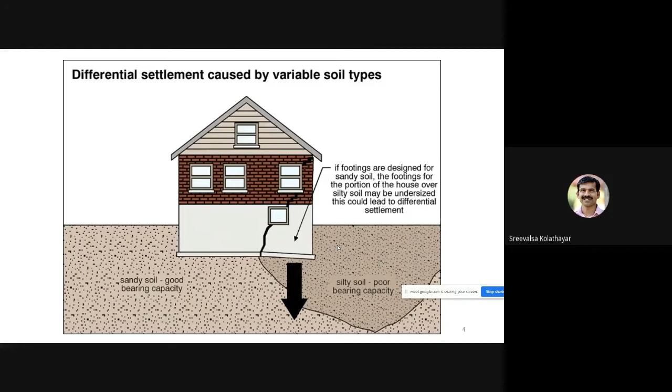If the same phenomenon of differential settlement happens to our house, it does not become a tourist spot, but it becomes a disaster because its utility value is lost. The structure will develop cracks.

So when infrastructure development takes place in a city or any region, slowly buildings come up - multi-story buildings, towers, bridges, water tanks. You see so many structures coming up, and there are so many things happening below your feet - the soil profile. The unsung heroes of civil engineering are buried right under your feet in terms of soil exploration, investigations, foundations, tunneling, and whatnot.

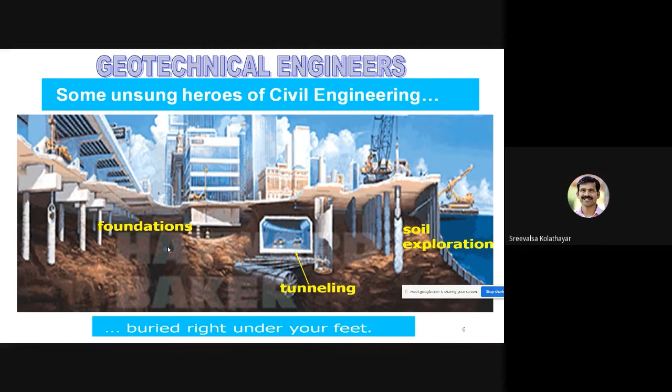If there is a very good, beautiful structure, everybody will ask who designed the building, who is the structural designer, and everybody will appreciate it. But nobody will ask who designed the foundation, who is the geotechnical engineer, who was the geotechnical investigator. Nobody will ask - only when the structure fails will people ask. When there is a failure, people will remember geotechnical engineers.

Anyway, that is a beauty and we love that.

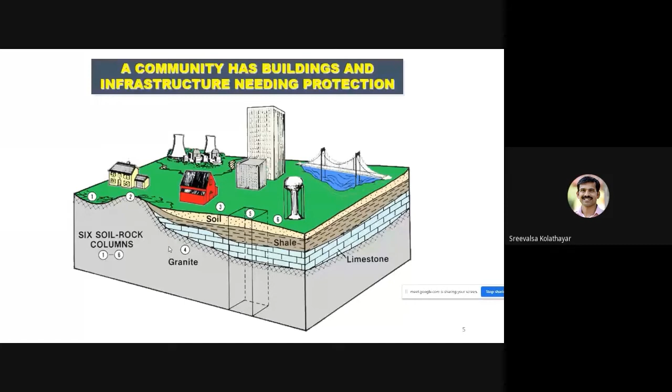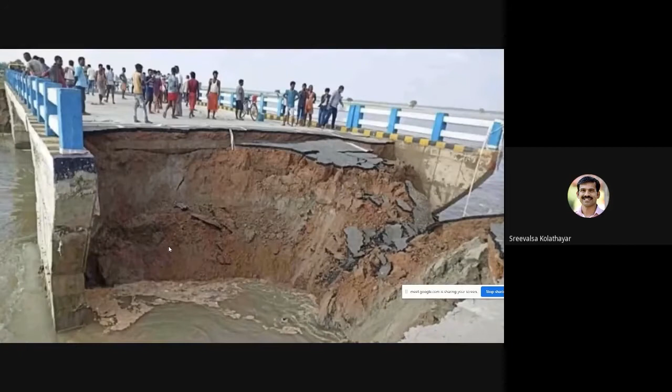This is a scene from Bihar last year during rainy season. One approach road towards a newly built bridge collapsed. So this is a kind of disaster - a land soil collapse that happened due to floods. It could have been prevented if the soil was reinforced properly or retained properly.

This is another structural collapse, another disaster - during an earthquake, a structure collapsed.

We say there is a disaster or a risk when 4 elements come together: hazard, exposure, vulnerability, and location. You can see this even when you talk about COVID risk - if you open your Aarogya Setu app, it will predict whether you are under risk or not based on these 4 factors.

Hazard - is there a COVID patient nearby? That is the hazard in this case, whether there are infected cases around you. Location - it will tell you within 500 meters there are 2 COVID patients, within 1 kilometer there are 8, within 2 kilometers there are this many. So that is why if you are now in Kerala or Maharashtra, you are under more risk.

Location, hazard, and then comes exposure. If you are wearing a PPE kit, you are not exposed. If you are wearing a mask, you are less exposed. If you are not wearing a mask, you are completely exposed. So exposure is also a main reason.

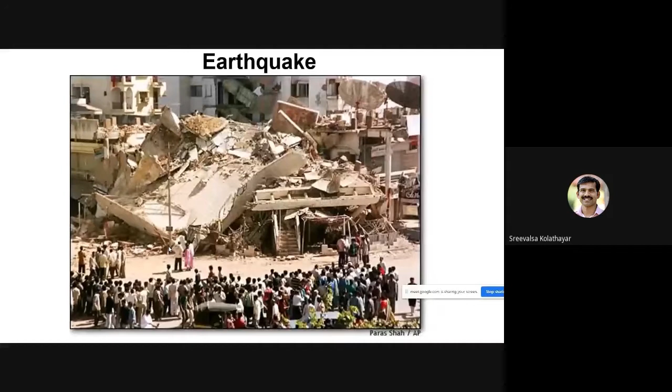Now I am showing you another picture from JR Kobe Line in Japan. This is the picture in 1992. You can see a retaining wall on the left and houses on the right.

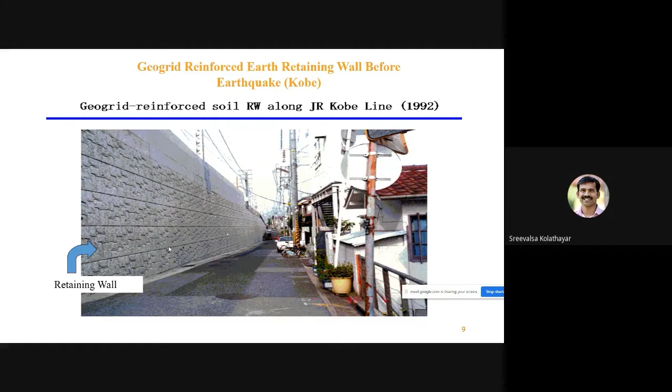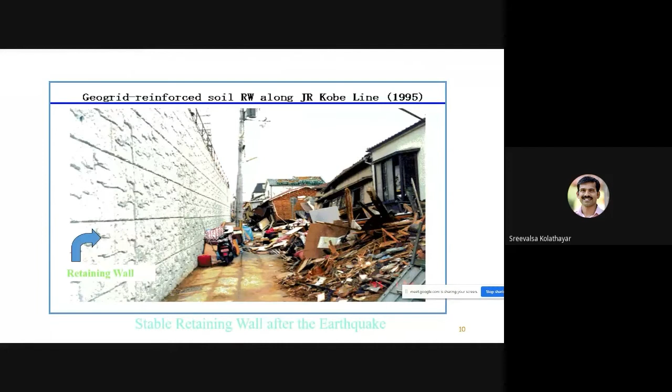In 1995, there was a major earthquake. After the earthquake, you can see all the fragile houses and buildings collapsed, but the retaining wall is very stable and intact. It is not even a concrete retaining wall, just made of soil, reinforced with geogrid. What you see covering is just fascia panels. Its vulnerability is reduced by soil reinforcement. This itself shows you the power of soil reinforcement in reducing disaster risk.

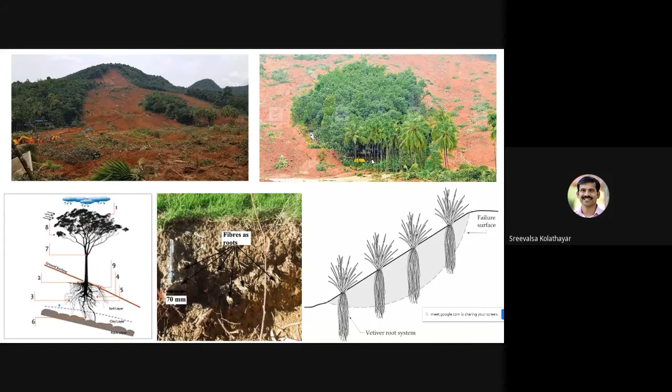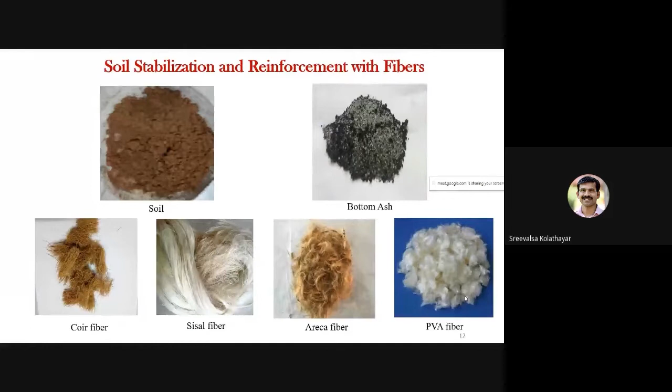This is a small study my students have done, which myself and Dr. Anil Kumar Sharma from NIT Patna jointly performed — reinforcement of soil with different types of fibers: Coir fiber, sisal fiber, Areca fiber, and also a synthetic fiber. I am showing only the final result.

We have done a couple of UCS tests and also a couple of model studies, and found that when reinforced with fibers, the unconfined compressive strength of the soil increases around 4 to 5 times with Coir fiber. Similarly with other fibers, the strength enhances. This was published in the Journal of Materials in Civil Engineering, and the model test was published in an ASTM journal.

You can see the soil fiber interface. Due to the interface friction, the strength property of the soil enhances. These are the SEM images.

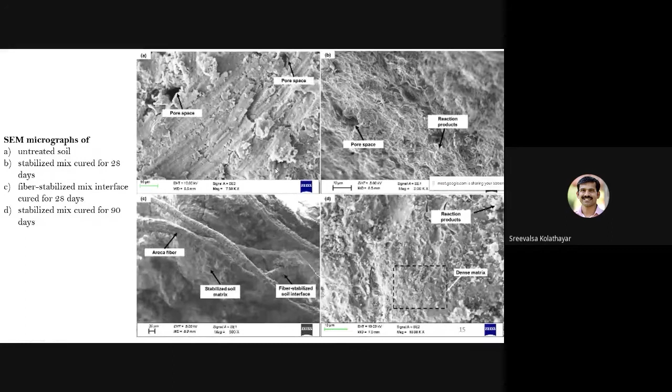That is about adding fibers to the soil and reinforcing it. Now coming to geosynthetics, a very popular method of reinforcing soil. You might already be familiar with geosynthetics, its functions, and different kinds of products, as they are very widely used these days, even in tier 2 cities, as well as in Chennai, Bangalore, Kolkata. But here in Mangalore city, when we recommend geosynthetics to some clients, they find it difficult to find contractors, because contractors have a preset mind that they have to construct RCC retaining walls, which costs a very high amount of money, may not be sustainable, and can even cause adverse effects.

While discussing the case study, I will share one experience I had recently. Anyway, let us go ahead with geosynthetics. It has two parts: geo and synthetics. Geo means earth or soil, and synthetics means fabricated or man-made product.

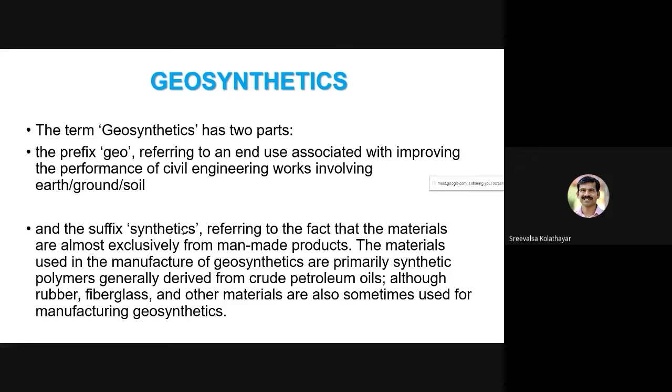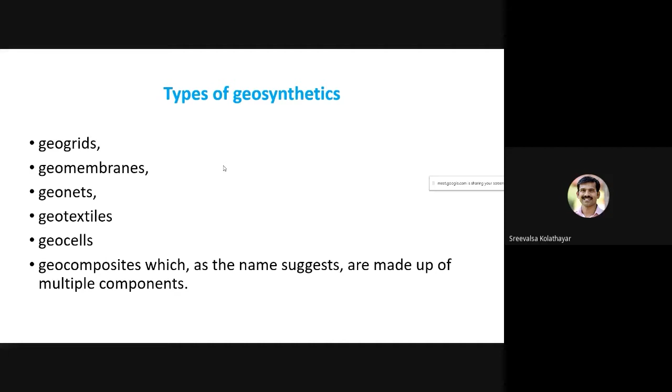So different types of geosynthetics like geogrids, geomembranes, geonets, geotextiles, geocells, and geocomposites. Let us see them. Before that, the functions of geosynthetics are mainly separation, drainage, filtration, and reinforcement.

If you want to prevent intermixing of two things, you can provide a geomembrane, an impermeable membrane, like canal lining or landfill lining, to prevent leachate mixing or contamination of soil or groundwater, or even in nuclear waste deposits. There are geosynthetic clay liners also available, because clay is also almost impermeable, embedded with impermeable geosynthetic membranes. So they are very effective.

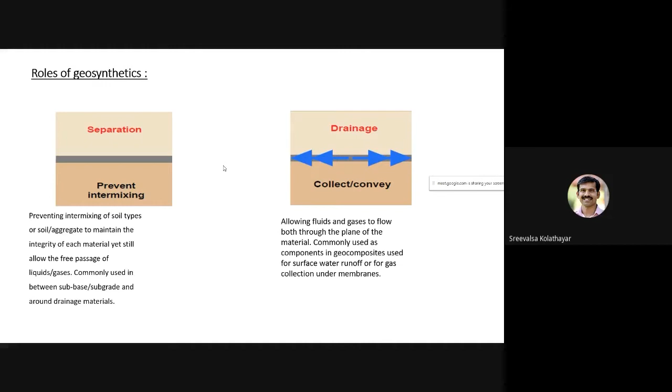Then drainage - geotextiles can allow water to pass, so it will enhance drainage. There are prefabricated vertical drains also available. And filtration - it will allow water to pass, but solid materials will be resisted.

So there are several applications where we need filtration and reinforcement, especially in infrastructure development projects where engineering properties are involved or prominent. This function is very important.

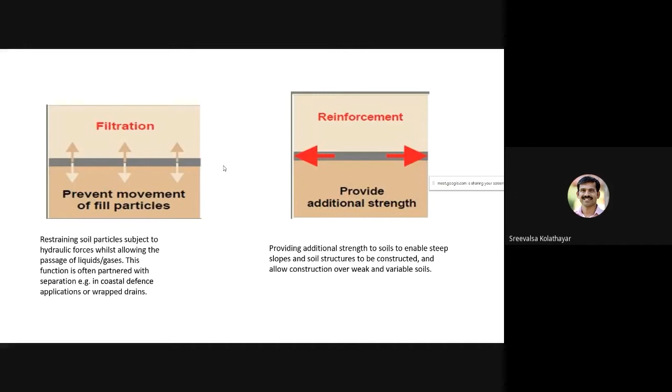Reinforcement provides additional strength to the soil. It adds tensile strength, because the geosynthetic material's engineering property is mainly characterized by its tensile strength as well as the interface friction angle, or the shear resistance friction, between the geosynthetic material and the soil.

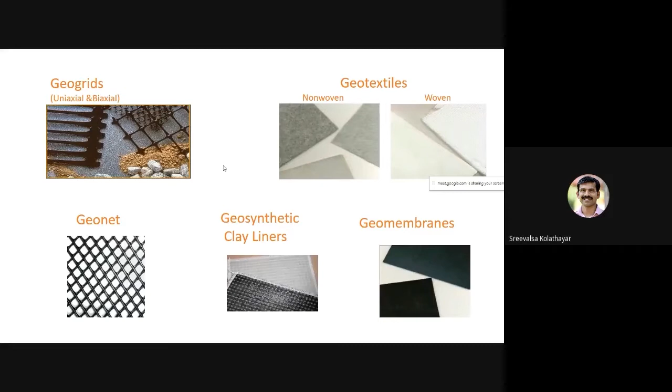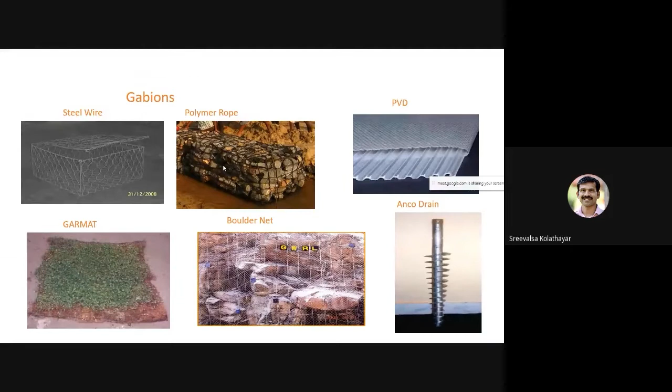So we already discussed geogrids, geotextiles, geonets - there are also geomembranes, geosynthetic clay liners. These are different products that come under geosynthetics. And then gabions, using steel wires or polymer rope, for slope protection. Then PVD vertical drains, GARMAT, boulder net, etc. They are used in different applications. We go for different types of geosynthetics.

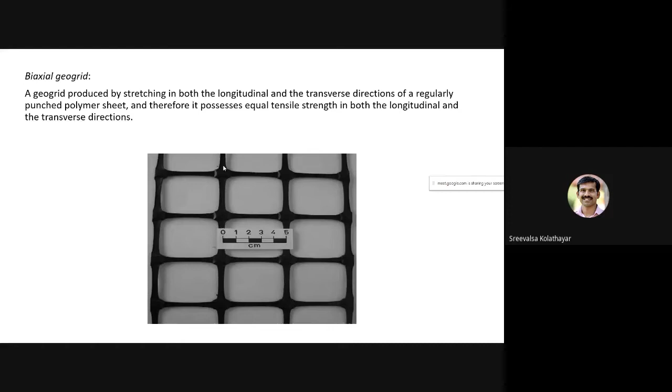So geogrid - there are uniaxial geogrids in one direction, as well as biaxial geogrids, which have equal tensile strength in both directions, longitudinal as well as transverse. Then there is geonet, which looks similar to geogrid, but its orientation is different.

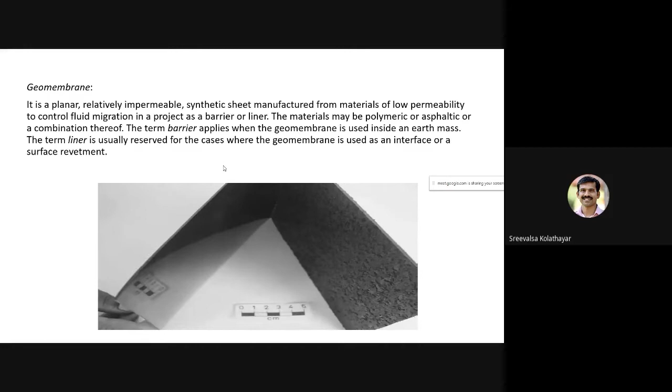Then geomembrane, which is impermeable. It can be used as an interface or as a liner, mainly used in water conservation projects, landfill projects, for canal lining, etc.

Then geocomposites, which is a combination of two or more materials like geotextile or geogrid. Then there is geocell, which is a three-dimensional honeycomb shaped material, mainly made from high density polyethylene materials.

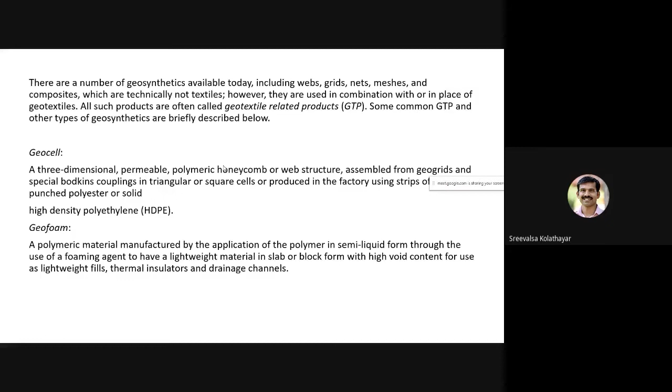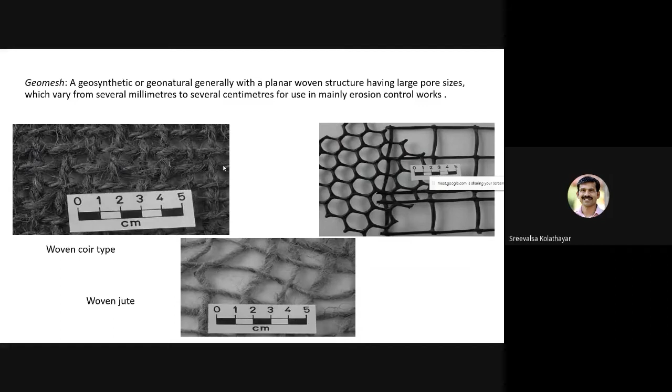And also geomat, which is used for erosion control. Then geomesh - geomesh can be manufactured from natural materials also. Then geopipe and geospacer. So like that, there are different types of products available in the market.

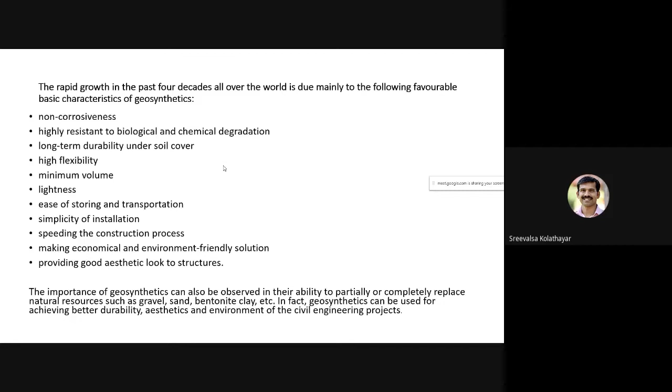And they are very popular because of properties like non-corrosiveness, being very light and easy to transport, cost effectiveness, and very good aesthetic look, etc. And as an engineering material, we go for it because it has excellent stress-strain behavior.

Most of them are ductile and can take tensile strength. It has very good flexibility, good filtration characteristics, and good permeability, especially for geotextiles, and excellent mechanical properties. Also, it can be welded together.

In geocell manufacturing, you do ultrasonic welding or high frequency welding, and it does not form byproducts, and it is highly resistant to varying climatic conditions, and resistant to biological and chemical attack.

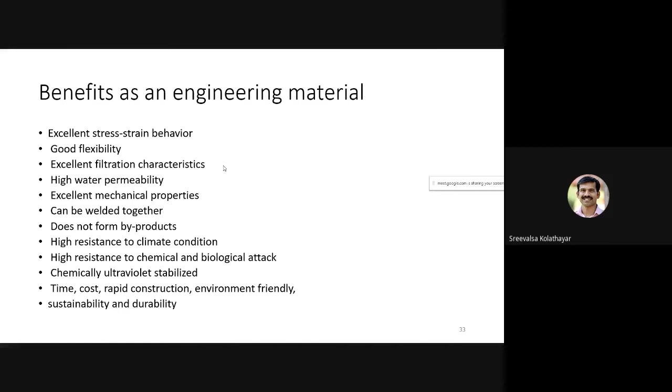And it saves time, saves money, and allows very rapid construction, and is very environmentally friendly and sustainable as well as durable. So that is why we choose geosynthetics in infrastructure projects. And mainly the raw materials are polymers, manufactured through the process of polymerization.

Also natural materials or fibers like jute, coir, paper, cotton, wool, areca, and sisal can be used. So they are called geojute, geocoir, etc.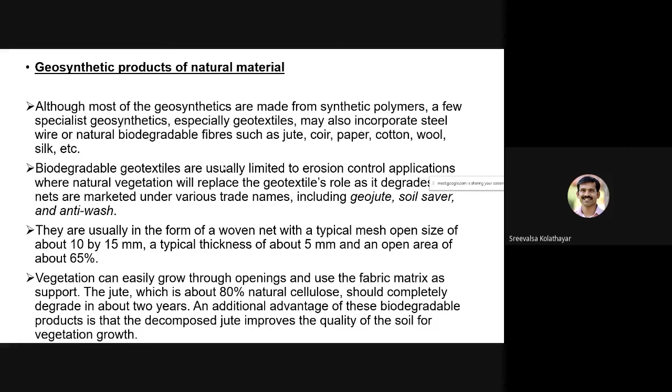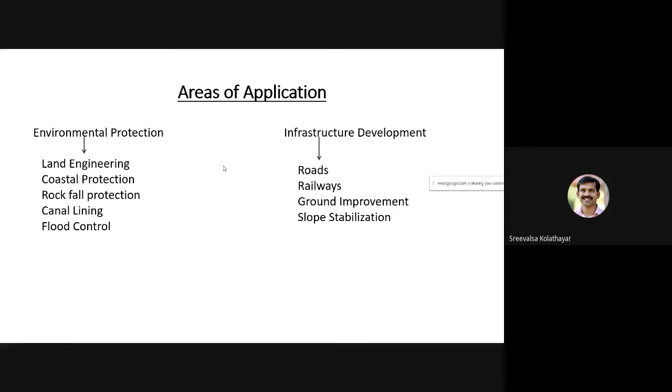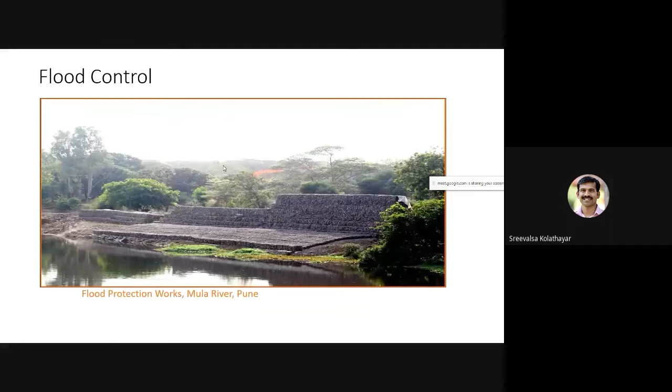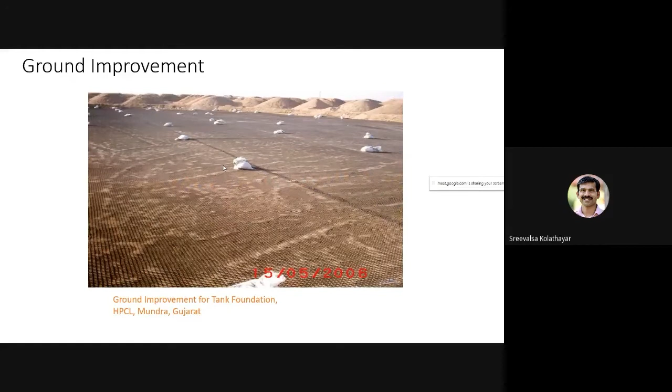Recently, in an MRPL consultancy project that came to us, here actually it's a very weak soil. They wanted to store bitumen storage tanks in the MRPL of high capacity, over 10 acres of land. So there we suggested a combination of geogrid and geocells.

Because it improves the bearing capacity 4 to 5 times. Then in slope stabilization, it has excellent application in stabilizing slopes.

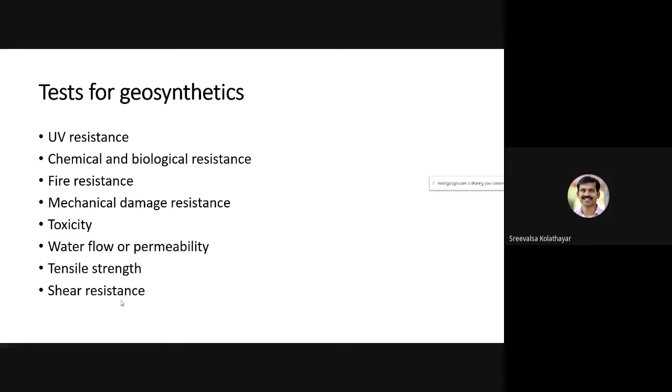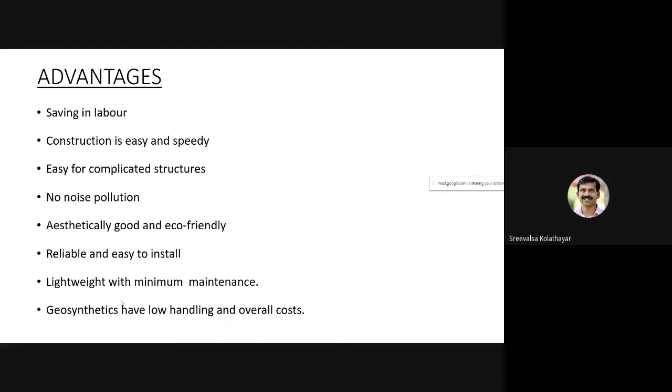And advantages, as we discussed - it saves labor, no noise pollution, eco-friendly, easy to install, and low handling cost.

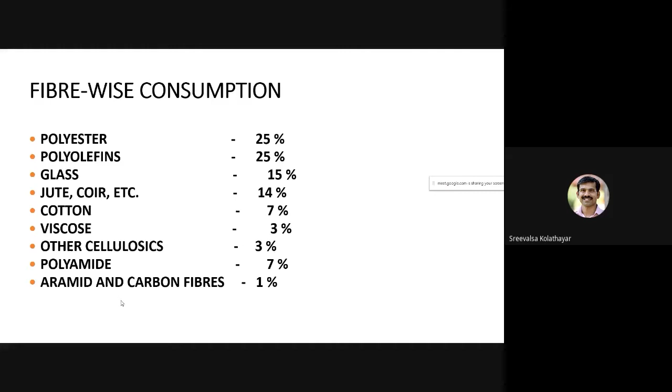So this is the fiber-wise consumption of raw materials. I will not go into this, but natural materials also take a good place in that.

Some case studies where geosynthetic materials are used for different applications like pavement, slope protection, and reinforced earth walls. If you provide an RCC wall or something else, it is an additional extra structure. But if you reinforce the soil, it is the existing soil itself that is reinforced. This reinforcement goes into the soil, say 2 to 3 meters, depending on the soil properties, the length of inclusion.

The existing soil itself is reinforced, and since they are permeable, no additional weep holes are required. As I was discussing recently, two consultancy works I was involved in: one, they approached us when an RCC wall and the entire slab collapsed. Earlier they had a masonry wall, and then the client constructed an RCC wall for additional protection. The masonry wall was perfect, there was no problem, but for additional protection they constructed an RCC wall, and they didn't provide weep holes.

During the rainy season, the hydrostatic pressure built up and there were no weep holes for water to go out. So what happened? The RCC wall collapsed and the entire slope collapsed. So they built the wall for additional protection, but it caused an adverse effect.

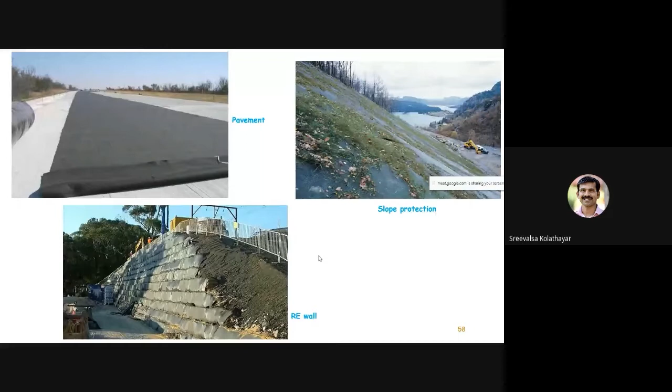Even though so many works have been done, if you discuss reinforcement, or attend an Indian Geotechnical Conference for the last 20 years, everybody talks about this. But still, even in tier 2 cities, these methods are not popular, and there are no contractors available to execute this kind of work. Clients directly give us letters asking for design of RCC retaining walls. They don't even want to explore other alternative options which are sustainable and low cost. So that is why there is a need to change. Even though this has been well understood for the past 20 to 30 years, I am still addressing it.

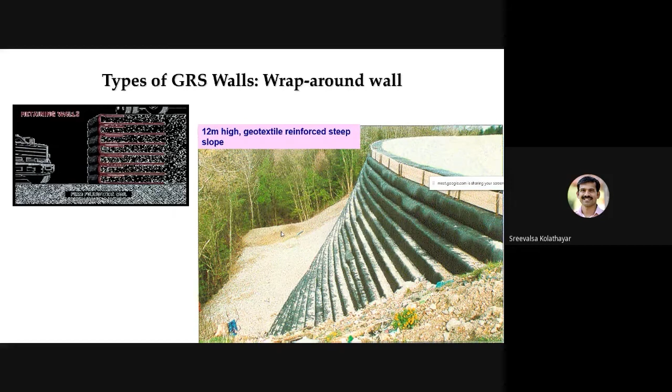But geocell is becoming popular these days. I will discuss about that.

In many flyovers and road bridges, and even in underpasses, on slope protection, you see they are mainly reinforced. The earth is retained with reinforcement, either geocell retaining walls or MSE walls, actually reinforced earth walls. So all the soil is reinforced with earth, and this is just a fascia panel given as a facing, as a covering. This is the soil itself, actually reinforced.

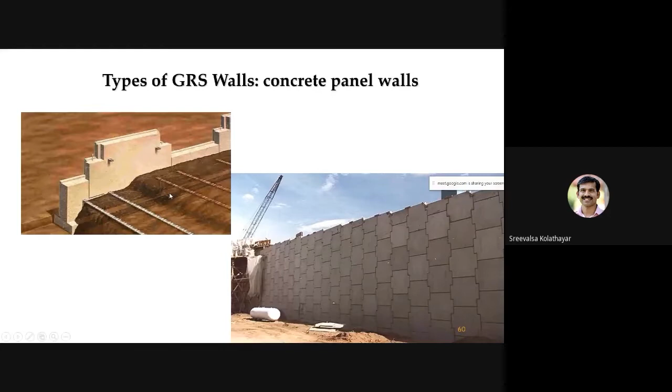You can see geogrid reinforced soil walls. This is a test we have done in our laboratory using Areca leaf sheath in manufacturing geogrid. I have patented this recently; the patent was published last year.

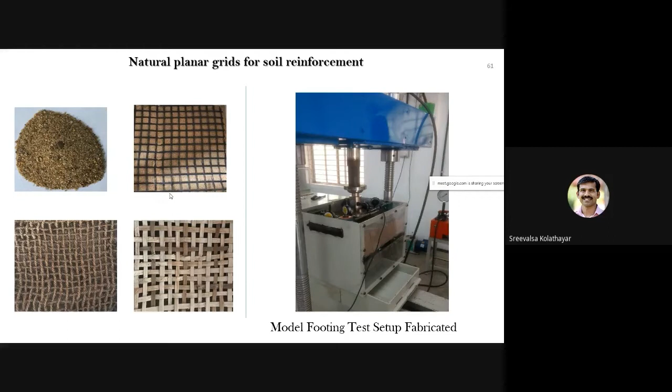We have conducted the model test in a small setup. This is the tensile strength test. Actually, the Areca leaf sheath's tensile strength is 5 times higher compared to polypropylene geogrid, but areca leaf is very brittle, so that is the problem.

Anyway, we conducted model studies and found that the areca grid performs as good as the geogrid, and the performance compared to unreinforced soil is much higher when we use areca leaf sheath grid. Geogrids were made from areca leaves, and we also compared with coir grids and polypropylene geogrid. The areca grid gives very high performance.

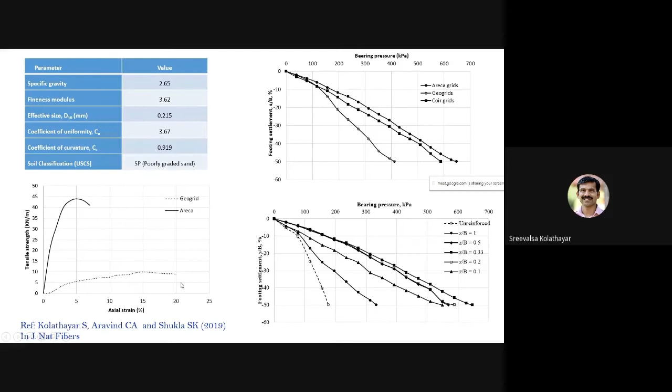This was published in the Journal of Natural Fibers.

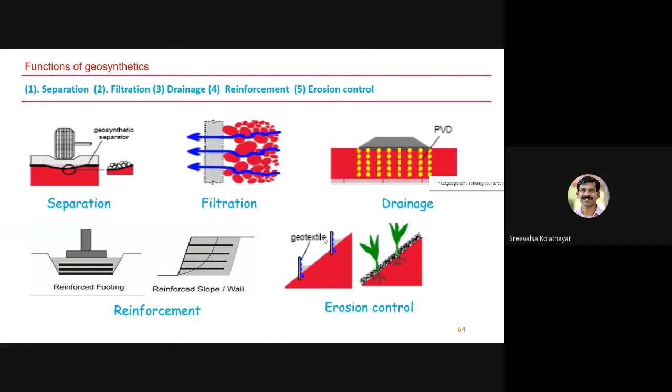Now I will move on to another geosynthetic product, termed geocells. As the term says, this is cellular confinement — cells made of geosynthetics or high density polyethylene materials. We have recently published a book edited by Professor T.G. Sitharam from IIT Guwahati, Dr. Amarnath Hegde from IIT Patna, and myself, a comprehensive resource on geocells. We have discussed the function of geosynthetics, and geocells also have similar functions.

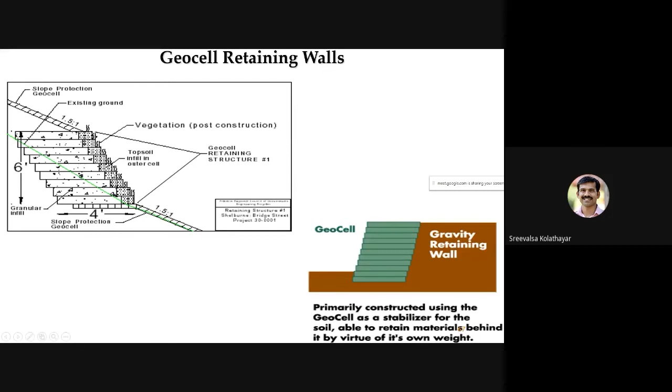You can see a schematic of a typical geocell retaining wall, geocell panels stacked. The beauty is that here you don't need any covering. If you go for soil nailing or any other technique, you have to shotcrete, but here you need not give any other fascia. If it is filled with soil, you can even grow vegetation over it, giving a green cover. So that is very good looking and cost effective.

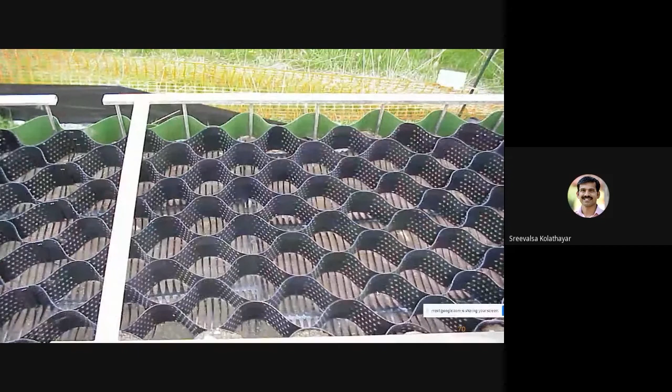This is an example, a case study from USA, which I got from the internet, where geocell was used to stabilize the slope. After completion you can see it is completely covered with green, but it becomes a very stable slope.

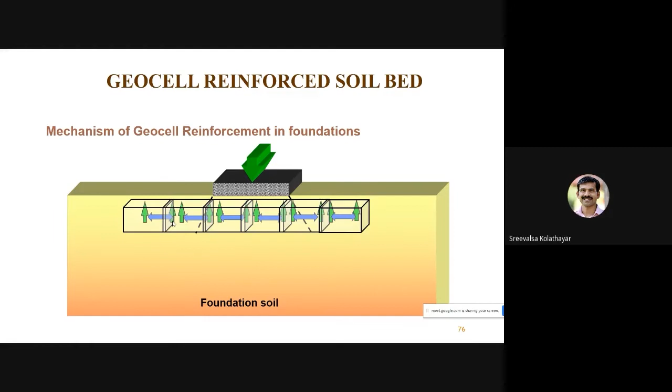Now, if you provide geocell reinforcement, it restricts the failure surface through vertical dispersion effect, lateral resistance effect, and membrane effect. The lateral resistance or shear resistance effect is due to the interface friction between the geocell wall and the soil. It adds strength to the soil, and even the bearing capacity can be increased 4 to 5 times with one layer of geocell inclusion. This has been demonstrated in the lab as well as in the field.

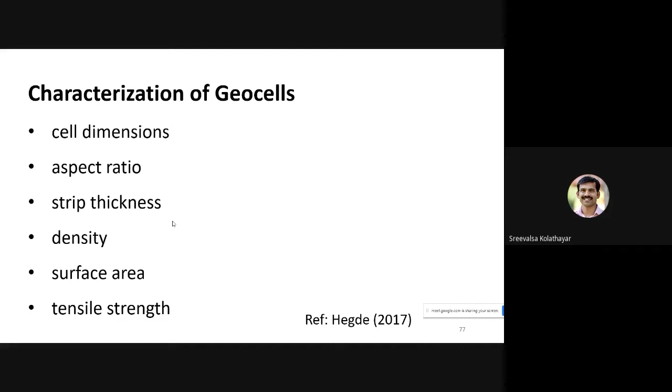The geocells can be characterized based on cell dimensions, aspect ratio, strip thickness, density, surface area, and tensile strength.

There are several studies done on geocells, starting with Kazerani and Jammnejad in 1987, and Bathurst and Jarrett in 1988, and Bathurst and Professor Rajagopal in 1993, along with a lot of model footing tests done worldwide. In India also, Professor Rajagopal, Professor Sitharam, Professor Madhavilata, Dr. Sireesh, Dr. Dash, Dr. Amarnath, and I am also working a little bit on geocells. These are some of the studies on model footing tests and geocell retaining walls.

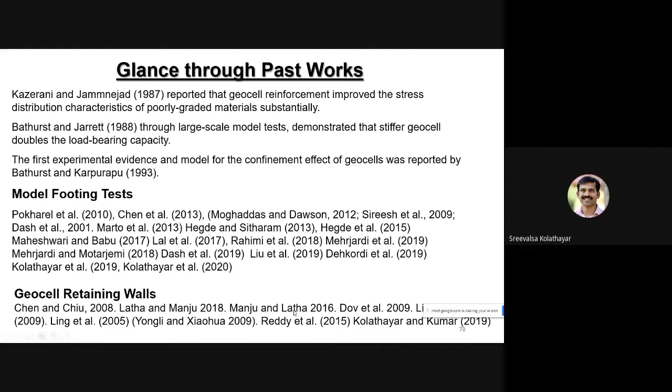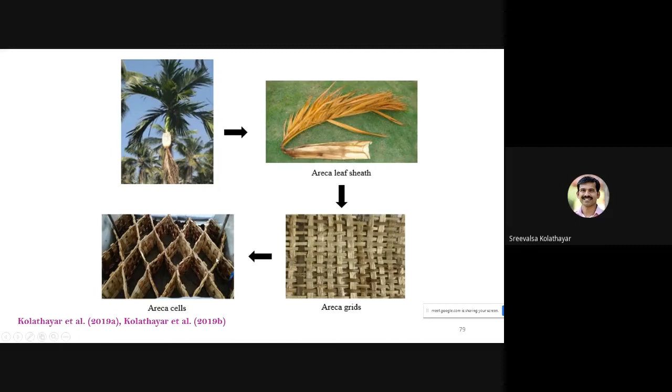So this is another study we have done, a model test using geocells made of areca leaf sheath. This was also published, with 2 papers published on this. You can see the areca leaf sheath used for manufacturing the geocells.

These are the material properties of the clay and sand used as infill material, and the tensile strength of the areca cells, areca leaf grid, and geocells. This is HDPE geocell, its tensile strength is 7.5 kilonewton per meter, but areca material has 44 kilonewton per meter tensile strength. So almost you can say it is 6 times higher.

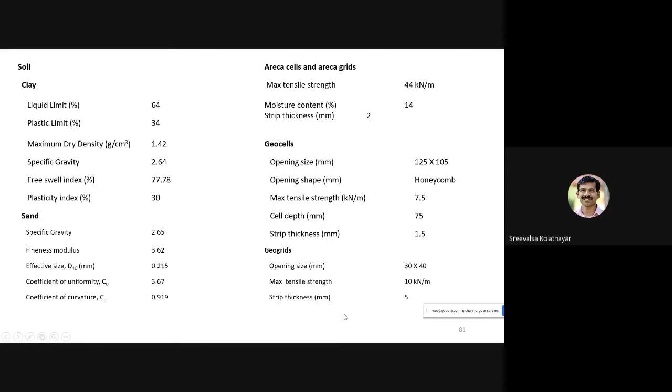So this is the result. We conducted the model footing test on a clay bed, and it was published in Geomechanics and Geoengineering. You can see the Areca leaf and Areca grid combination gives much higher performance than the HDPE geocell and polypropylene geogrid combination, and compared to unreinforced cell, the increase in bearing capacity is also much higher.

There is a 4 times increase in the safe bearing capacity and ultimate bearing capacity of the soil when it is reinforced with geocells. Even with the natural geocells, it performs as good as the commercially available geocells.

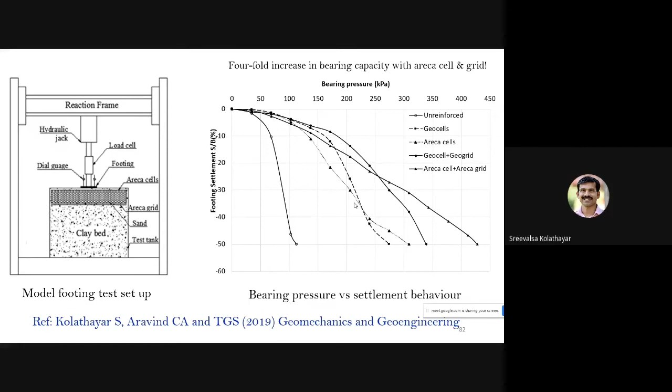The commercial HDPE geocell costs around 300 to 400 rupees per meter square, whereas this natural material is available like a waste, free of cost; it is only about stitching and manufacturing. But durability is an issue which can be addressed by treatment. In slope stabilization applications, even that is not an issue, because for short-term stabilization you can give the natural material, then do vetiver plantation, whose roots will go deep in 1 year's time. Then this Areca material will degrade in 2 years and become manure for the vetiver.

I will not go into the mechanisms in detail. To be very brief, these are the 3 mechanisms: lateral support reaction, vertical stress distribution, and membrane effect.

I will not go into the technical details, but the vertical dispersion is because of the height of the geocell, and lateral resistance is due to the interface friction angle, denoted delta, which is the interface friction angle between the geocell wall and the soil contained within.

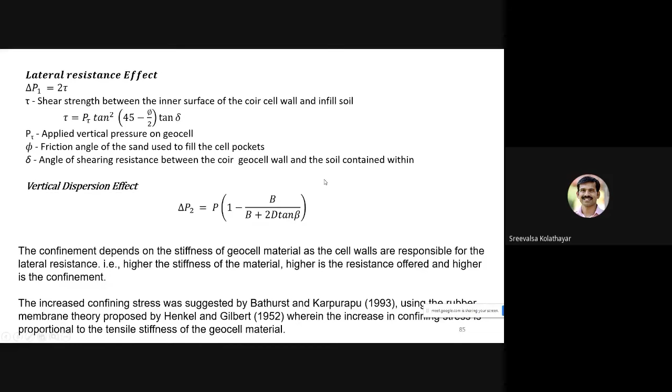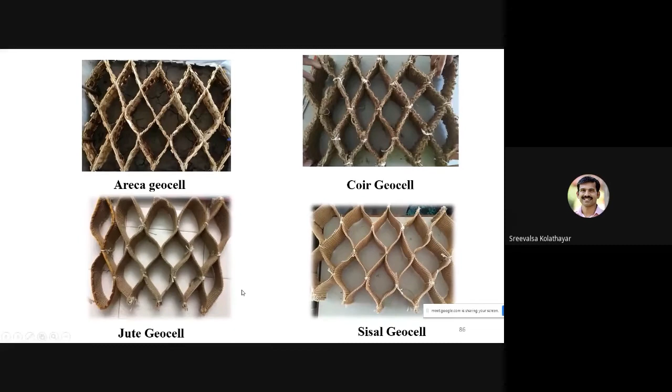We have also developed geocells from coir material, Sisal, and jute. These are also first of its kind work that we have done, recently published in the ASCE journal. The coir, jute, and Sisal also perform much better, as good as commercially available geocell materials.

Now I will take you to a model retaining wall test.

Till now we have seen model footing test, how it performs as a model, as a reinforcement, or as a retaining wall. Simply by stacking geocells, you can form a retaining wall. You build it by stacking geocells and filling it with gravel, sand, or simply the existing soil itself.

So that is the beauty of geocell retaining walls. You need not give any additional fascia or cover. You can simply plant vegetation if needed, but that is also not mandatory.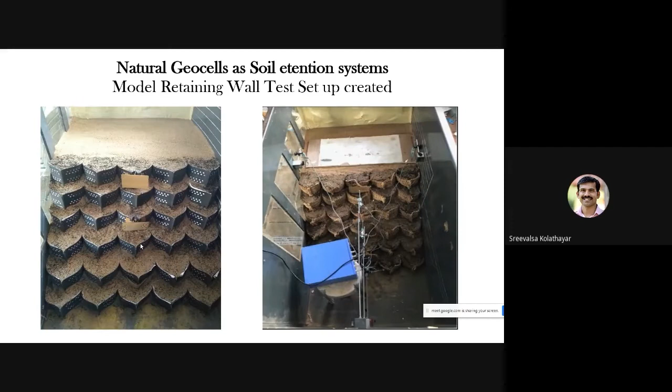So we have done some model studies, model retaining wall tests on HDPE geocell as well as coir geocell in a model test plan. This work was done by an MTech student with no facilities available - we did not even have a hydraulic jack to apply load. He used construction blocks to apply load. But this paper was published in a good journal, Geotechnical and Geological Engineering by Springer. It was that student's hard work.

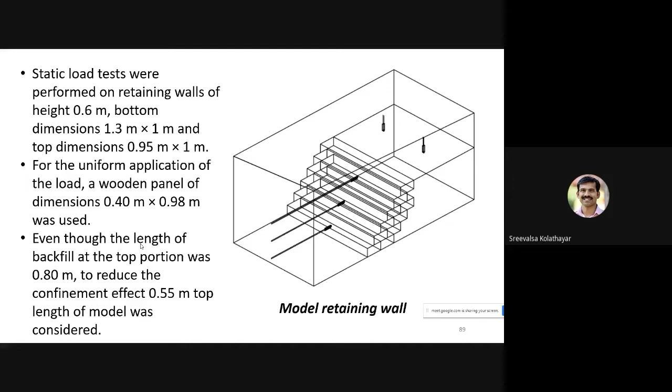So the entire test setup was a jugaad actually. With existing resources, he conducted this test. You can see how the load is applied simply by putting the construction blocks. The load was applied using a platform made with a panel.

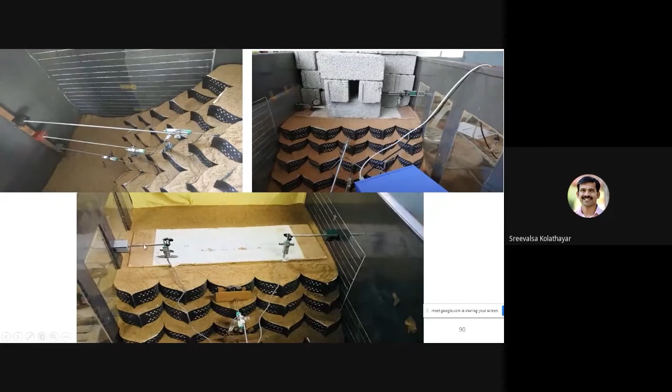So the final result has shown that when you provide the geocell retaining wall, the horizontal displacement versus pressure - the displacement was very less. For the unreinforced case, even with one block, it started displacing. But when the geocell retaining wall was constructed, even at higher pressure, the displacement was less. The HDPE wall performed much better. This is under dry condition.

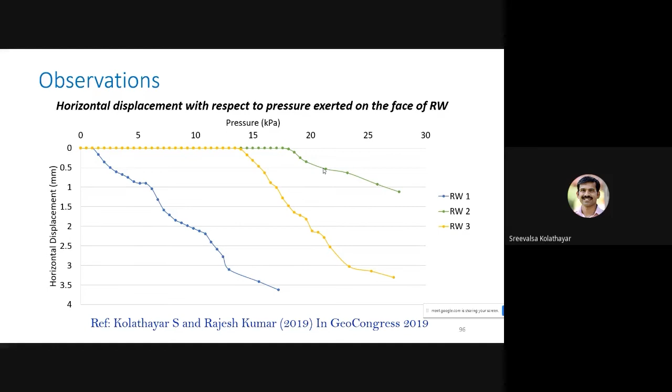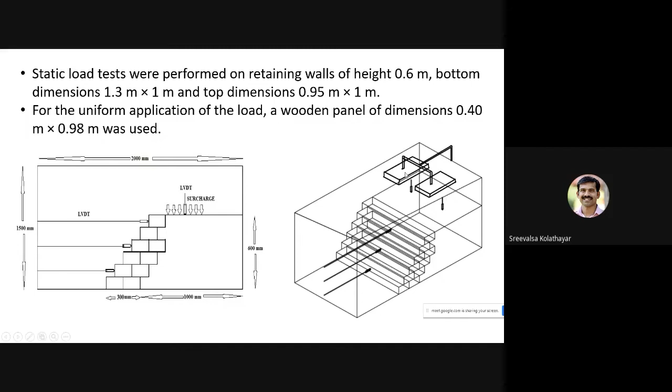But under wet condition, we even replicated simulated rainfall using a shower setup - this was also a kind of jugaad we have done. Even under raining condition, under wet condition, the geocell was performing better, and to our surprise the coir geocell was performing much better than the HDPE geocell.

Why? Because the coir geocell was much more highly permeable - HDPE is impermeable, and water can drain only through the perforation, so hydrostatic pressure builds up. But in the coir geocell, there is no time for the water pressure to build up, and liquefaction is less. There is no pore pressure developing, and fast drainage happens because it is highly permeable. So under wet condition, the coir geocell retaining wall was able to resist the soil displacement very efficiently.

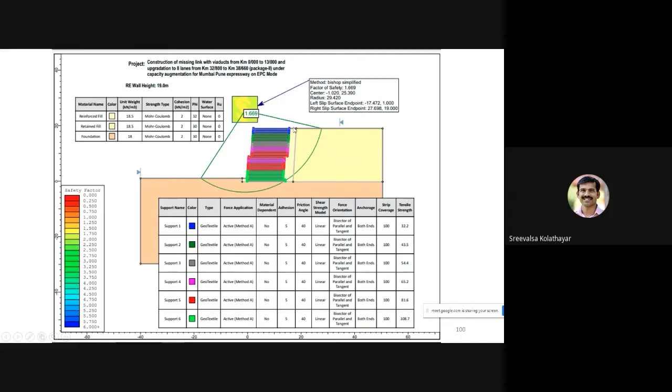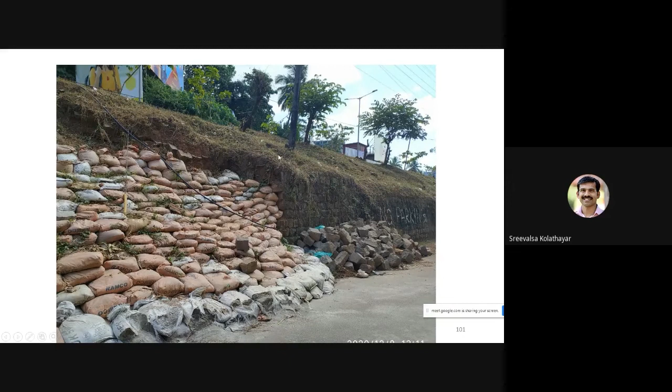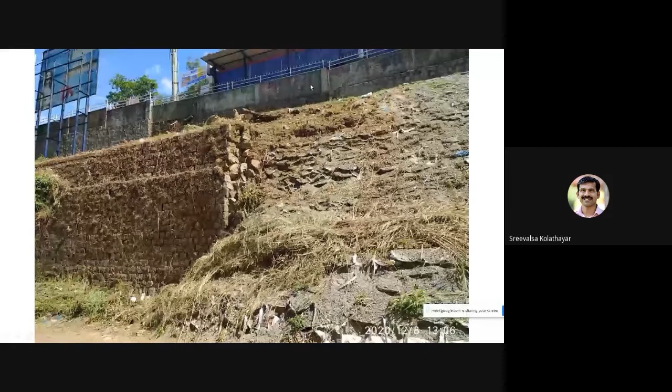They also have a plan to expand the highway by one more lane. Here we suggested solutions - you can see the pictures of collapse at different locations. At some locations, there was already a masonry wall up to 10 meters high, but it collapsed. Under rainy season, it's a real threat, because there is one road going below and a highway on top, and this lower road is also used daily.

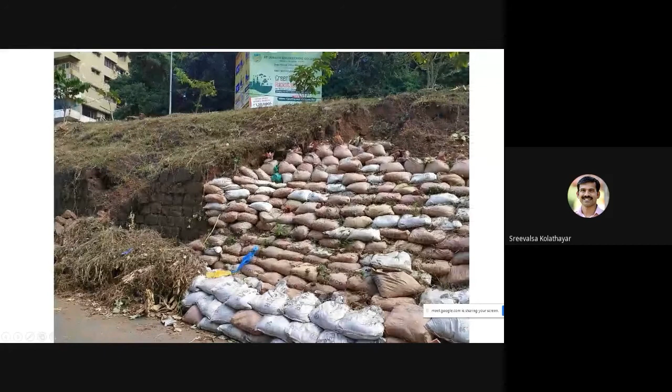When the collapse happened, they tried to retain the soil temporarily using sandbags. So we gave them two designs. This is one design we gave, because it is an existing highway - we cannot do reinforcement from the bottom more than 2 meters into the highway, since only 5 meters is available. Beyond that is the highway, so we cannot dig completely. So this design involves soil nailing on top and bottom.

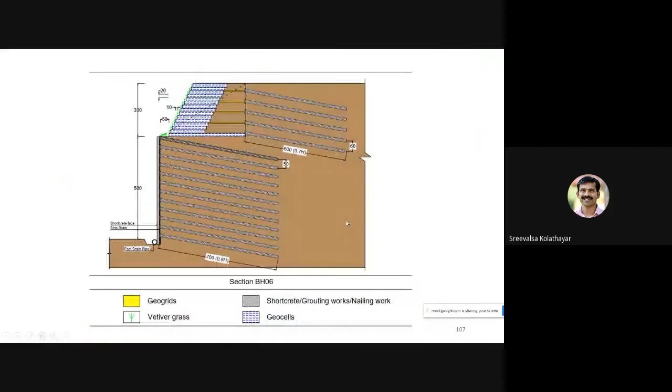On top, the existing slope is shown in dashed line. So there it can be excavated with geogrid and geocell fascia. That is one design we have given. But already there are so many locations where a lot of collapse happened, so there that cannot be applied. So they wanted one more design. This is the design that we have given.

I will not go into the analysis. We have done the analysis in Plaxis, Geo5, and also manually, and also Presto Geosystems gave us software that we also considered. It was very intact, very stable. The factor of safety was more than 2, even under wet conditions.

So this is the design we have given, a combination of soil nail plus geogrid plus geocell. This geocell thickness is 2 meters. The beauty is that this will keep the soil intact, and this will also act like a gravity wall. And the soil nailing is there, so the earth pressure will be considerably reduced.

So this is the combination of soil nailing, geogrid reinforcement at half meter interval, and at 1 meter interval, that geogrid which is connected to the soil nail, that will go into the geocell system. So it is a complete one, continuity is there.

You need not give additional drainage, and even in the outermost fascia you can have soil infill and grow vegetation also. So this is the design that we have given.

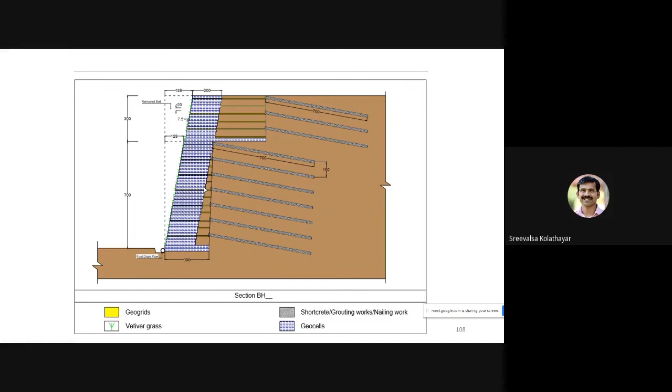So there is a need to popularize this, because in terms of durability it will stay for 100 or more than 100 years, and it is very efficient, cost effective, environmentally friendly, and in terms of strength aspects also very effective. The carbon footprint is also much less compared to concrete, where cement and steel are highly used. So we should go for sustainable techniques available.

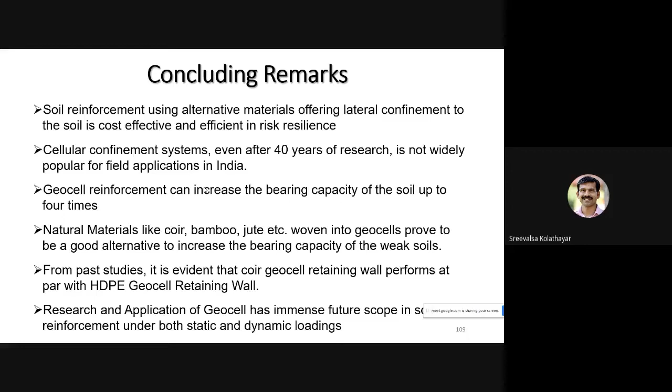With this, I will end my presentation. The concluding remarks are simply, I will not read out, but it is that there is a need to popularize soil reinforcement using geosynthetics or fibers made out of synthetic or preferably natural materials, especially in soil stabilization applications. And there is a lot of scope for research also.

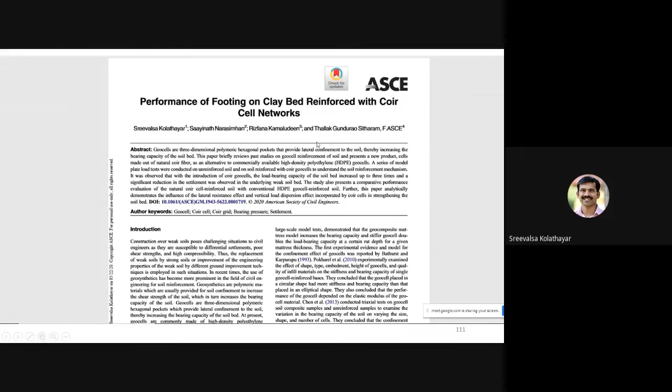Thank you. So if there are any questions, I will be happy to take them.

Yeah, thank you, Dr. Sreevalsa. A very informative session, and you have covered all aspects of soil reinforcement. Thank you, sir. One beautiful thing that I always notice in your presentation is the quantum of work that you show, the hard work and dedication of your students who are involved with you, and you are also able to relate with field studies, like you have shown a lot of case studies, and this is definitely going to motivate all the researchers, students, and people willing to work in this field.

There is no shortcut to success, we all know, but then we get motivated when these examples are presented. So although you mentioned that you don't fit for this session, for this GeoLive, I don't accept your comment. You definitely fit here, and we definitely appreciate your effort, it's amazing. I don't have words for you. In such a short span, you are still very young, and you are doing so much work. Thank you very much, that's amazing.